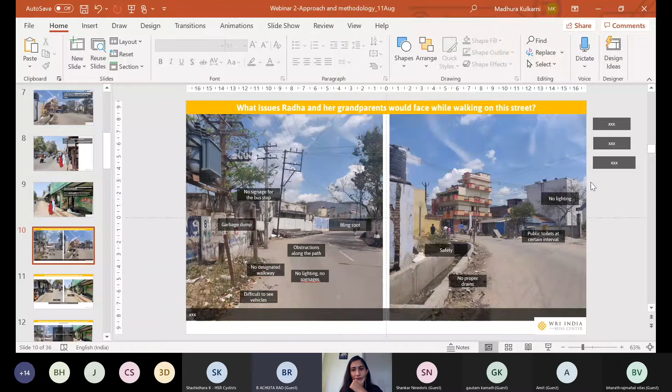Okay, anything? Actually, the lighting also should be there. Suppose during night time, the street lights are equally important. Yes, so lighting is also one of the issues, because right now we don't see much lighting here. So that is also a point.

Yes. And a lot of garbage there, and also maybe some sort of benches at certain intervals would be good for these elderly to just rest for a while before they go ahead, because if you see, there's no shading also along this street. We can just see one tree here which is shading a bit, where even this person is sitting. So if there's no point where they can actually halt or stop for a while, there's a good chance they won't be able to walk this distance at a go, right? So probably some sort of pause points.

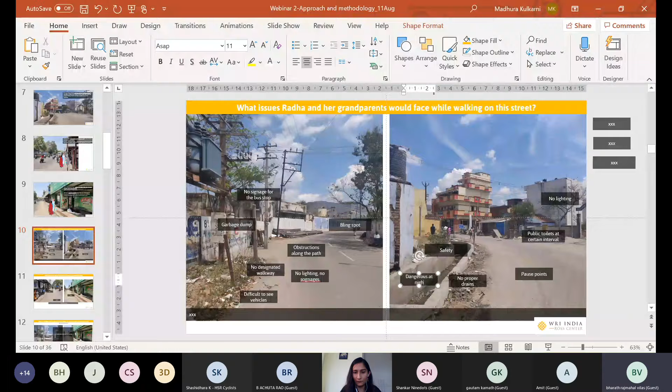In the picture on the right, actually, there's an open gutter. Again, that is dangerous in the sense that at night, if the gutter is full, people can fall into it. If there isn't enough lighting, children can fall into the gutter if it's full of water and get washed away. It has happened sometimes in Bangalore when gutters are full and the same level of water is maintained in the gutter as well as on the road. People don't know where the road is and where the gutter is, and people have fallen in and got washed away.

Yes, the gutter has to be covered. Okay, so we'll come down to solutions, but here the issue basically is that open drains are really dangerous at night, so someone can fall.

Shashi, you want to say something? So one of the things I just noticed was this road is a downhill road, and there is no speed restrictors for vehicles coming downhill in the second picture. And the second thing is road crossing - I see shops on the right side, so there is no zebra crossing, or signs for people to cross. How do they, if they have to go to the shop, or if the bus stop is on the right-hand side, how will they cross from the left side? So that is something missing.

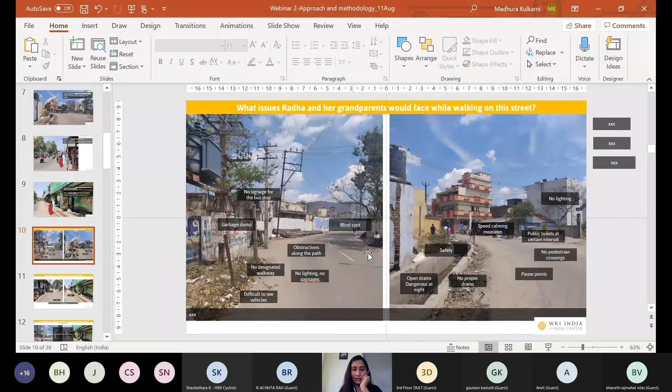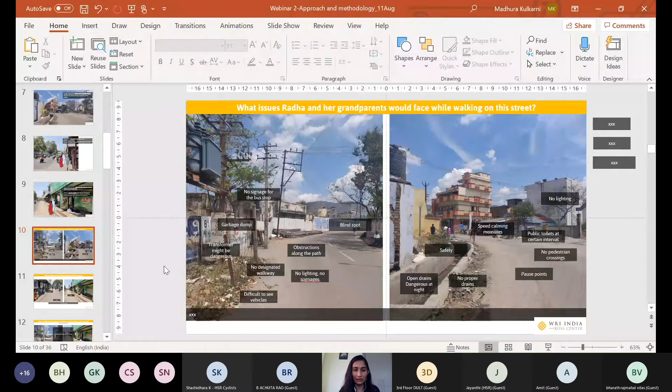Yes, that's a very important point again. So I think, it's quite a comprehensive list we have - another thing I thought is that there's this transformer right here, right? So there needs to be something around it so that the fear of them touching some wire gets ruled out. This might be dangerous - right now it's just covered with barbed wires, but if an elderly happens to hold it, it wouldn't be a good experience. So now these are some issues we thought we can see, it's quite evident that they are there on the street.

Now let's go to this bus stop that they are walking to. Can we talk about some issues you see in these pictures related to the bus stop? Think about that story, what's happening at this bus stop. A lot of us have already heard that the bus doesn't stop at the bus stop, it stops a little farther away, and there's so much crowd that it becomes difficult for elderly to climb the bus. Does anyone want to start off?

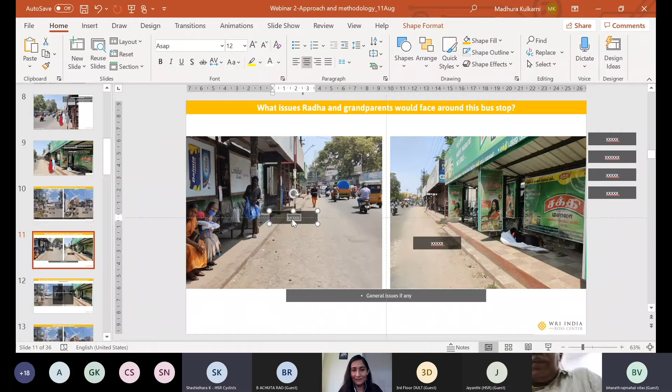Yeah, I can add a point. The bus markings are not there. What buses stop here? That is very important.

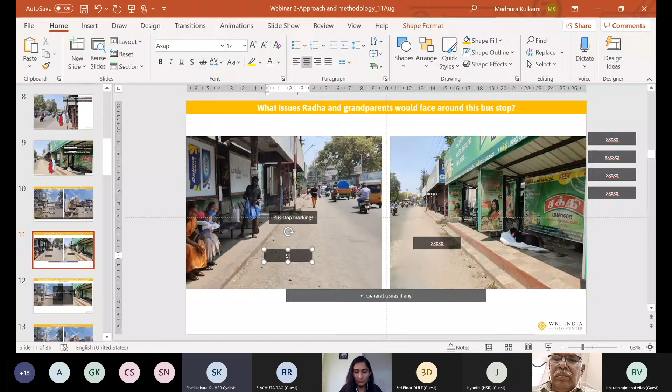Markings. One thing I noticed is that there's a step there, so it is very hard for elderly people to climb down for sitting areas, and even for physically challenged and others. It's very hard for them.

I don't think there are lights in the bus stop. It doesn't seem like there are lights. I think the bus numbers are not marked, the routes and timings and all that.

That is one thing. Secondly, as a general principle, not just in the bus stop, one general issue is cleanliness. In the middle of the road, as you can see from these pictures, it's actually most clean because the traffic keeps moving, so all the dust and garbage gets pushed to the side.

So generally there is more dirt, garbage, trash, dust and mud towards the edge of the road. People prefer to walk on the road rather than go towards the edge because the edges are more uneven. There will be obstructions, garbage, mud, water logging, all kinds of things. From a walking perspective, one has to make it easy to walk on the edge of the road or on the footpath.

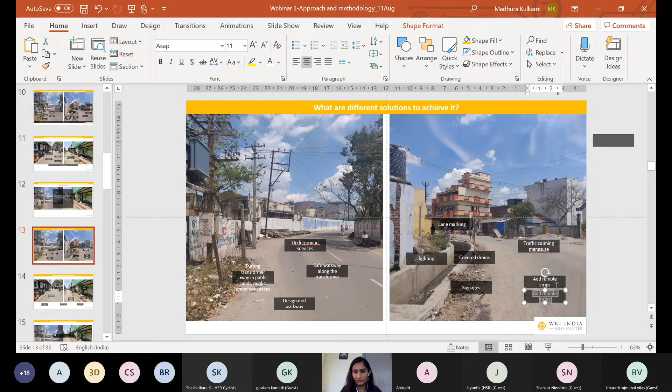I think a speed breaker would be better. Okay, I'll just write it here.

Pedestrian crossings - someone suggested some time back that there's no pedestrian crossing at all. Yes, at the junction, this is Shashi there. I just mentioned on the right side there are some shops, so there's no pedestrian crossing to that side. Sorry, because I'm sharing screen, I can't see your names, so I can't call your names out, but I can hear you.

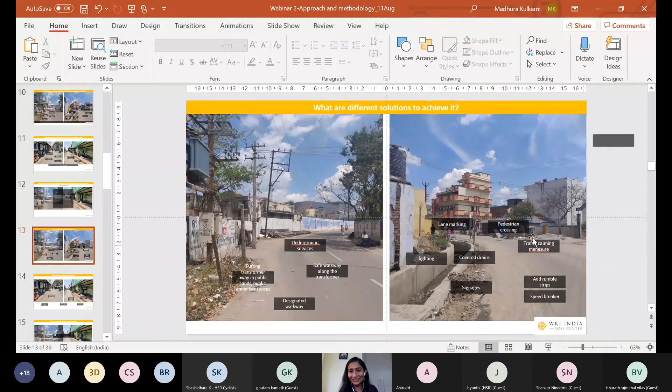Plant some trees for shading. That is also something, for thermal comfort. Seatings, if could be done.

Wherever we are planting trees, if you are planting trees in that place, particular shade, there could be a bench. That's quite interesting because then we can design seating spaces along with these, and they can also have some signages there, or something for people to sit and talk in the evening, probably elderly people to come and sit.

So put some water, drinking water facility, a nice place for water. Public toilets also we discussed - public toilet, yeah. Garbage - dumping the garbage in a specific place. So waste management has to be done.

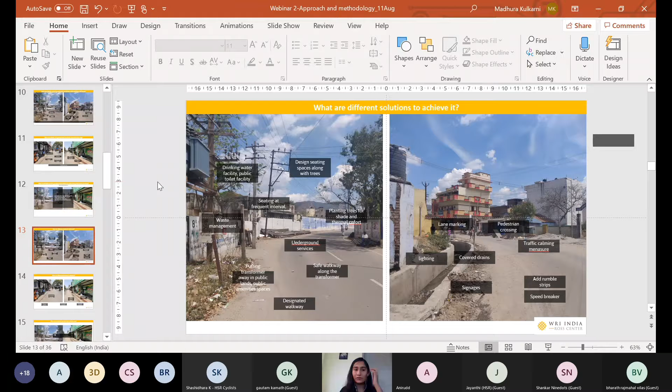So the idea is that under SUMA, it's not that we just want physical interventions, it could be different things. Like we spoke about how, as ma'am was saying, they should be able to know the average waiting time. So there could be some technological interventions there too, so they get to know on an app when the bus is going to come, how far it is - different ways to do that. This kind of technology is available, we can actually integrate it.

Now the next part is, now that we know what our site is, what issues there are, who the people are who are going to use it, we can go back to the data also to see that we have these things mapped. We can always, at every point, go back to the data we have collected and see what sort of interventions we can propose.

With all these different kinds of solutions we just discussed, it's also very important to know who to talk to - government stakeholders and others. Let's talk about who we should approach for these interventions we discussed, for the street and for this bus stop. Who do you think we should talk to? Let's first talk about government stakeholders - who would be important?

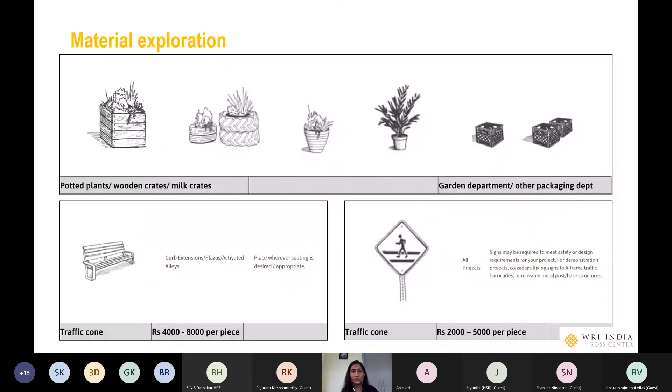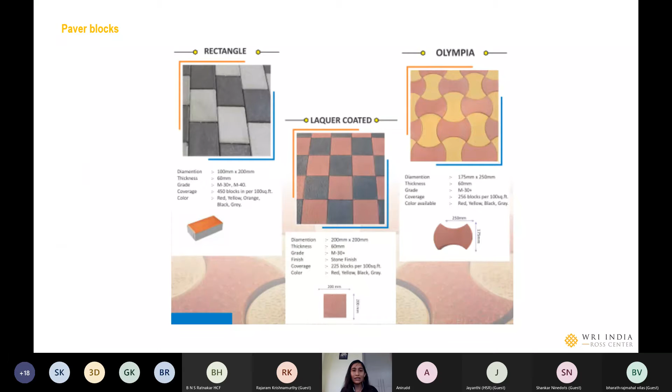So at this point we have some material lists ready for you, how much those things cost, how to bring it, how to get it, and all of that. I don't want to go in detail of this, but we have it, and we'll share it with you all - what are different materials, how to get it, where to get it. All these things we will be able to share with you.

But after this, there is one major thing which comes about. Once we have executed, we have to keep in mind that maintenance is also one of the things we have to look at from the start, so that we have certain funds allocated to it also, or some ideas on that from the starting. That's why we wanted to talk about this maintenance right now. Let me know if it is too much information - we can go back and look at the processes again towards the end.

But at this stage, to explain about different maintenance models and a case study, I would like to invite Chetan to take this forward. Yes, hi, am I audible? So to understand maintenance, we'll be looking at a case study just to know what it is when we execute any project - how do we go forward? So within that, first we'll touch upon different types of models.

So they are not exhaustive here - I've chosen three models, but they can be a mix of it. And then we do maintenance at different stages. So we have to think of during-implementation maintenance, post-implementation maintenance. And also when we are implementing any project, there has to be supervision from the community in terms of what exactly we expected and whether that's actually the thing happening on the ground. So let's move forward.

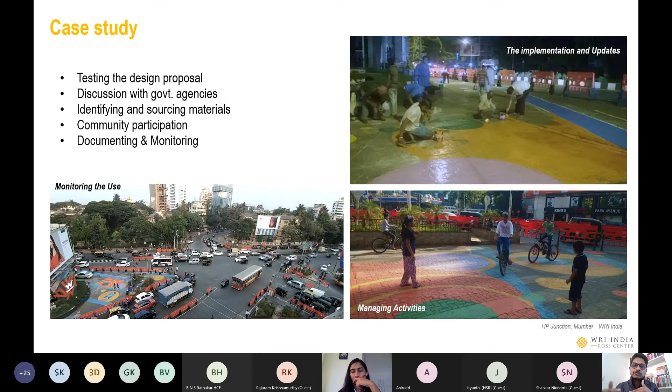But even during this trial, there is a certain part of maintenance, like the paint wearing off. So we had to have that identified responsibility. We at WRI would be going a few days or maybe 2 times a day to check out if anything has moved, and put barricades back in place.

Even communities would be helpful - if you see the corner barricade on the left hand side that was moved, they put it back into place. They would also see if something was obstructing movement, then change that dimension a bit to identify if it works, watering plants if planters were brought in, repositioning things, and if there was minor damage we would repaint it. So this is all which went into the process.

And now once everyone was convinced, we could actually go forward and execute it.

In this part, once we go into the stage where we are actually executing something, the responsibility of maintenance has to be handed over because it's permanent implementation. As we had discussed with all the agencies all along, they knew what was going to be handed over to whom - like the traffic islands would be handed over to BMC, Municipal Corporation, and painting was taken over by traffic police.

Then the street lights - as these were new features and there was no light there, new street lights had to be brought in. There were some planters put around, so the Garden Department of Mumbai took it over. Cleaning and regular maintenance were taken over by BMC, Mumbai Municipal Corporation.

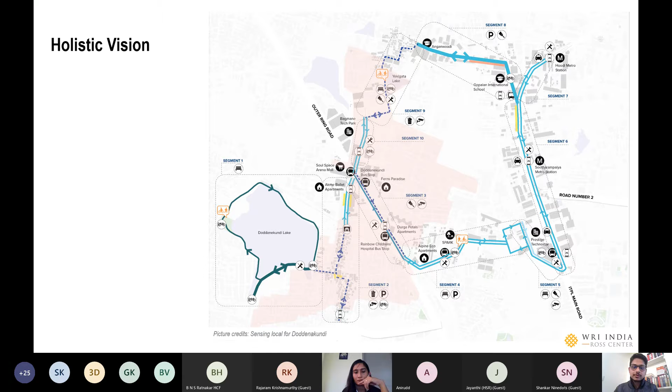I'm taking this example from Doddenakundi. This is a holistic vision that the neighborhood developed for itself under SUMA. But once we go forward...

There could be a pilot site identification - this is just an example, don't think this is being done, this is what we are just assuming for the case right now. So there could be this X area identified, with a cycle track made, good footpaths, and utilities like water, bus stop - these things are taken up.

Going forward, we would do implementation of this pilot - once the designs are finalized and everything is done, we would implement this entire thing. And going forward, there would be an impact assessment - what went right, what went wrong, we need to understand. Then minor changes might be needed so it could be replicated or grown towards the neighborhood. Next is scaling up.

So we take learnings from this and now grow the entire project throughout the neighborhood going forward. For example, if this is the pilot that is executed, the next phase could look at replicating certain things and completing that loop, similar proposal. Then there could be a second phase that talks about alterations and completing missing links, going forward to complete the entire proposal. So the entire neighborhood now becomes sustainable.

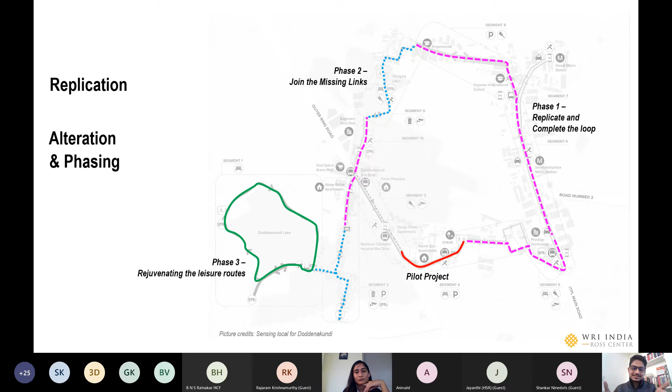In the end, it's the entire vision for the neighborhood, and the entire goal is to create this sustainable neighborhood. So all parts of this project should be stitched together to make this entire proposal for the neighborhood, not just focus on one implementation at one project at one site.

There are multiple projects, as rightly Madhura mentioned. We would make an exhaustive list of things we're going to implement, and then prioritize a few. Then we'd find other funding sources for certain things. There could be CSR funding for junction improvement, for safety, for bus stop improvement. We could use MLA funds for benches. Any and all of these combinations could be used to extend the entire proposal beyond what SUMA fund can provide. Over to you, Madhura.

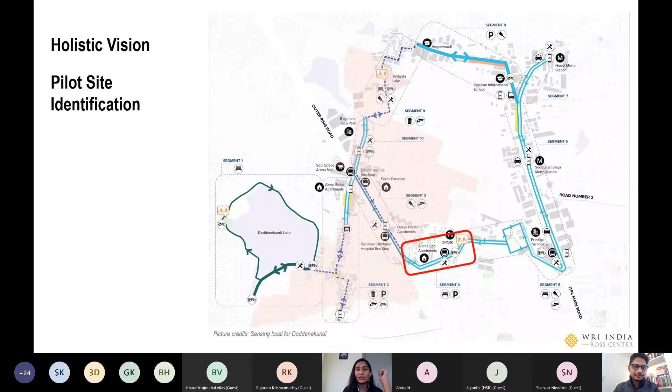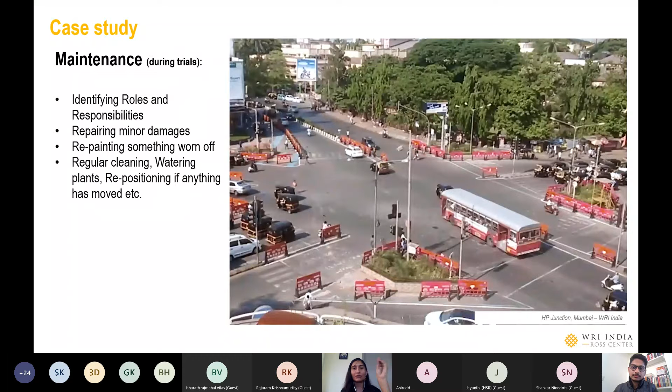Thanks, Chetan. I'd just add one point. We showed this case study where we did some temporary trials and then implemented it permanently, but this is not a mandate. Not all proposals in the neighborhood will have to go through this process. This is just an example to show that if we're looking at maintenance, we have to look at it from different points, different stages in our project. We need to make sure we're considering some sort of funds or strategies for maintenance. So it's not a mandate to do temporary trials before going permanent.

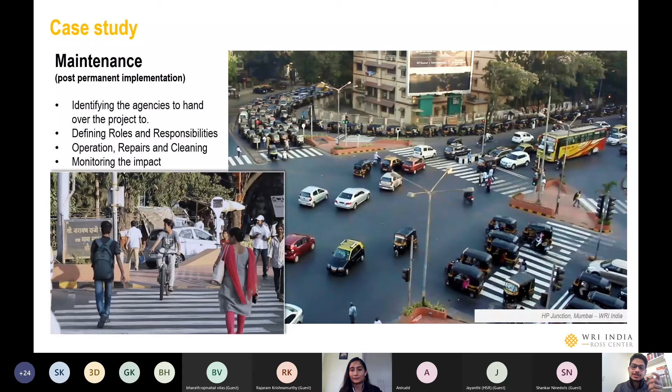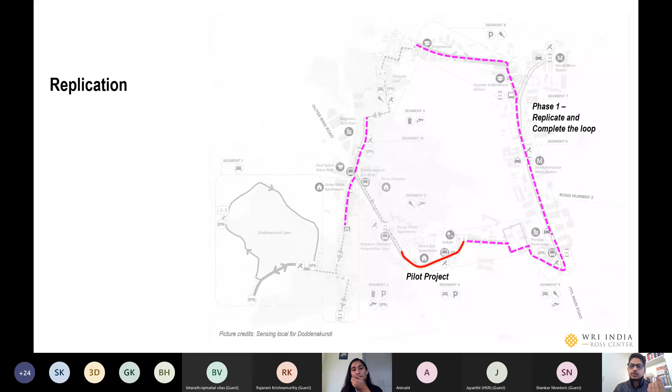To clarify, this was a project where traffic police were not sure, so we could not directly go for implementation - that's when we did the trial. It's not always necessary to do a trial. We can directly do implementation, because for footpath improvement or signage and many other things, we don't have to do trials. We can directly go into permanent implementation.

They could also be mixed, like pop-up lanes, which is a mix we see on the ORR - a temporary way of installation but semi-permanent in nature, with signages along with it. So based on the nature of the project we're going to implement in a particular neighborhood, we can decide if we need a trial before implementing or not - those things we can discuss.

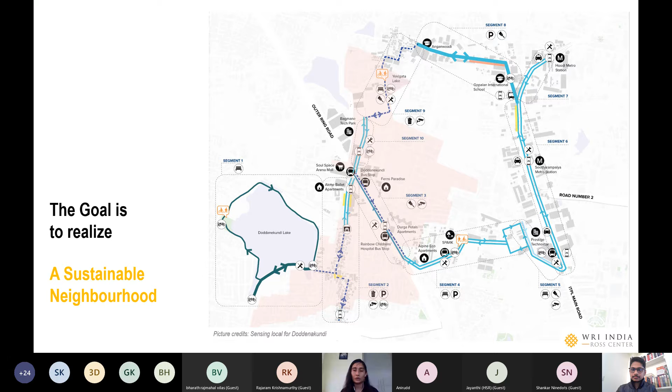Once our proposals are ready, we can discuss where a trial is required and where it's not. That discussion can happen with the nodal team also that's working with you. So I guess this is the whole process we'll be following as we work ahead. Now I'd like to open the floor for questions.

Can I just come in? Yes, please. I'm Bharath from Rajmahal Vilas, Rotary Rajmahal Vilas. I wanted to mention, since the group is here - the WRI team, DULT, and all the other SUMA partners - often I've been talking to many people, and I've seen many things. I have an engineering background, and I wanted to point out in a general fashion that there are often so many different points and ramifications we may not realize or see, and they're all interlinked. I'll take a minute to point some out so everyone can share.

One thing is, I was talking to some girls about why they're not using public transport and are taking two-wheelers instead. I asked if it's because buses aren't frequent, or what the issue is. They came up with a very interesting answer I hadn't realized - they said there is a lot of eve teasing at bus stops.

So they actually prefer to take their own two-wheelers. This is again an issue of policing, right? There are so many aspects why public transport may not be convenient. Another thing I noticed was there was a beautiful bus stop, but everybody was always standing on the road.